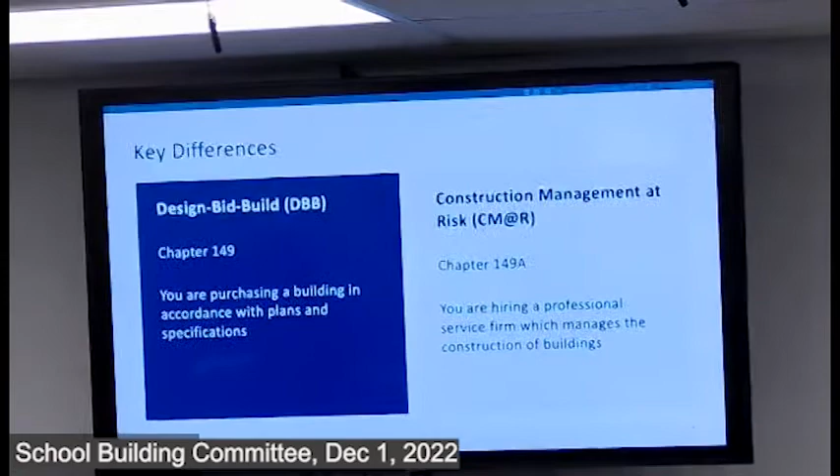John, excuse me one second - does everybody in the room understand what 'filed sub bid' means? I'll get to that in a second. Excuse me. No, that's okay. Then chapter 149A is construction management at risk.

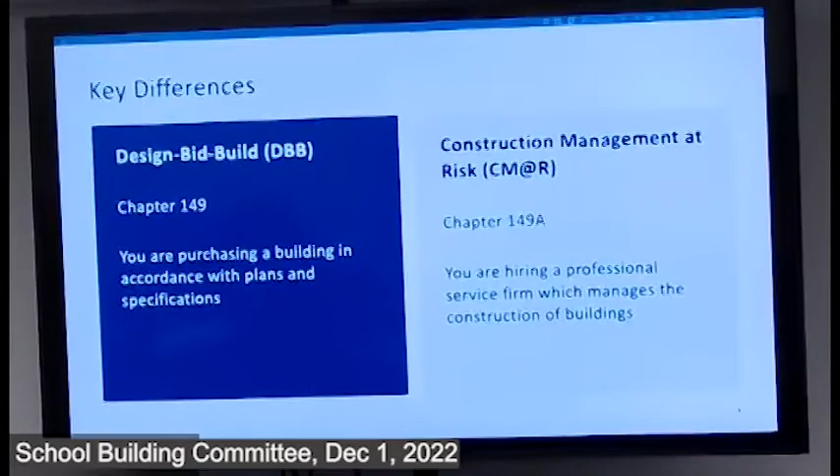The theory here is you are bringing a construction partner in while design is still ongoing, and they become part of the team, and they're supposed to represent your interests. That works sometimes, and sometimes you don't get as good a partner. It's a qualifications based selection, so we'll send an RFQ out, we'll send an RFP out. They'll submit their credentials, their previous experience. There'll be some fee information, and then a committee that the building committee will form will review the proposals, go to interviews, and make a selection, very similar to what you did with the OPM, but maybe a little more involved.

So with the CM at risk, we still have the OPM because the OPM is really in our interest, correct? Our responsibility is 100% to represent you at all times, whereas with the CM, we hope that we get a partner who is aligned with us too. But it's important that we have the OPM who's done this before. Part of that, the act that revised it, that's when the OPM requirements were enacted, back in 2004 I think it was.

This group, eventually, the school building committee will make a decision between these two options. Yes, and then a group or a selection committee from this group would also then select the CM via the interview and proposal process. Would that be a process structured by the MSBA, like other processes were? No, it's really local, they don't have any votes or anything per se, but they give you a lot of latitude in that one.

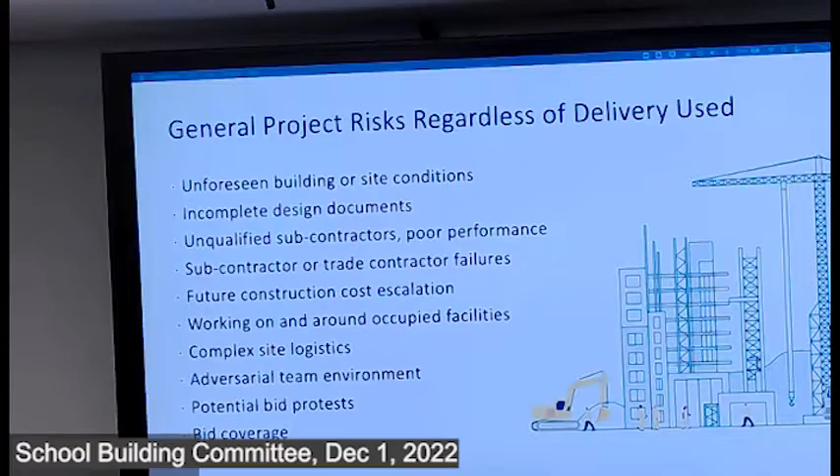Bid protests, you see these every once in a while, it's incumbent on us and your design team to make sure that doesn't happen. And bid coverage, we've run into this more and more lately, where contractors are being more selective on what they bid. Ideally we get three or more bidders in every trade. We've had some struggles with this more recently because of the economic arena we're in, but hopefully that doesn't happen here.

Cost implications: there's 18 filed sub-trades. Don't ask me to name all of them, but it's all the mechanical trades, tile, flooring, painting, acoustical ceilings, elevators, masonry.

The things that are not filed trade bids are concrete, site work, drywall, things of that nature. By statute, we have to bid these, pre-qualify subcontractors, and advertise. Regardless of CMR or design bid build, we have to do a public opening, so we'll work with your procurement people to make sure that happens.

The direct subs in a design bid build are the choice of the general contractor. They'll choose the site guy, the concrete guy, the drywall guy. We don't really have any input in that. I think in a bid situation like that, the general contractor is kind of forced into taking the low bidder, whether or not he's qualified, because they have to win the bid, and then they worry about making it work after the fact.

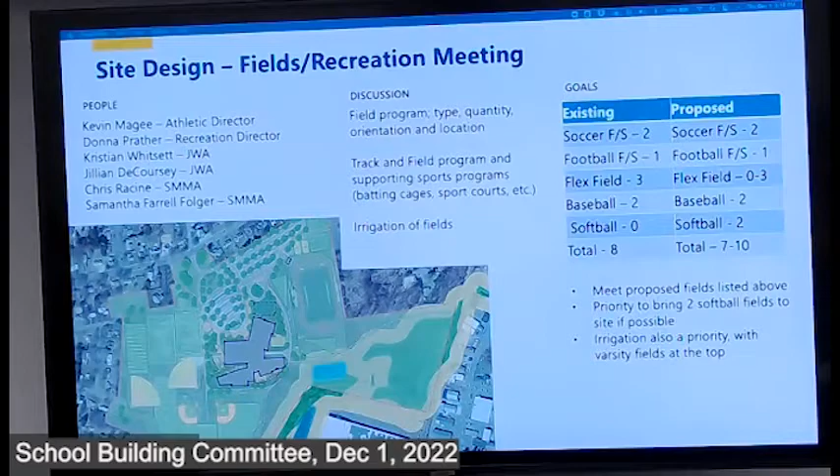To talk about the field recreation meeting: we had a meeting November 10th, not quite a month ago, with Kevin Magee, the athletic director, and Donna Prather, the recreation director, discussing the fields program and recreational uses. Our main discussion topics focused on the type, quantity, orientation, and location of the field programs, both existing and proposed. We also discussed the track and field program and supporting sports programs—javelin throw, discus, shot put, batting cages, sport courts—and then finally touched on the topic of irrigation of the fields.

The big takeaways were trying to bring 2 softball fields to the program as a priority. Kevin had mentioned 2 soccer fields and 1 football field on the western side of the site, outside the synthetic track area, that would need to be designated for sports and lined out at the appropriate dimensions, but the other potentially 0 to 3 fields could be flexible and used as outfields. The goal would be to bring in 2 softball fields and still have 2 baseball fields, but really to prioritize Title IX—ideally bringing in softball and focusing on the varsity fields for both baseball and softball in either scenario—and then having irrigation as a priority for the varsity fields, recognizing that right now irrigation on site only works on the baseball field.

I think there's irrigation throughout—that was something new we hadn't heard—but they've heard a lot of issues with the use of natural turf fields throughout the summer, especially with drought conditions. So if possible, trying to irrigate those 3 rectilinear fields and then the 2 varsity fields, baseball and softball, so those sports would have continual use without the deficit of dry or compacted fields.

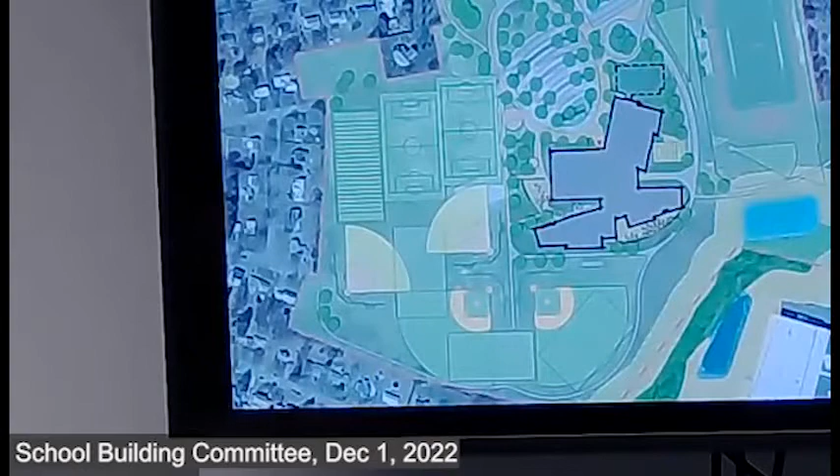Other things we discussed were the location of the basketball courts. Kevin noted they had previously been located closer to the school. He appreciated the educational use of having them closer to the school, but noted the issue of phasing and timing if those were to come online sooner.

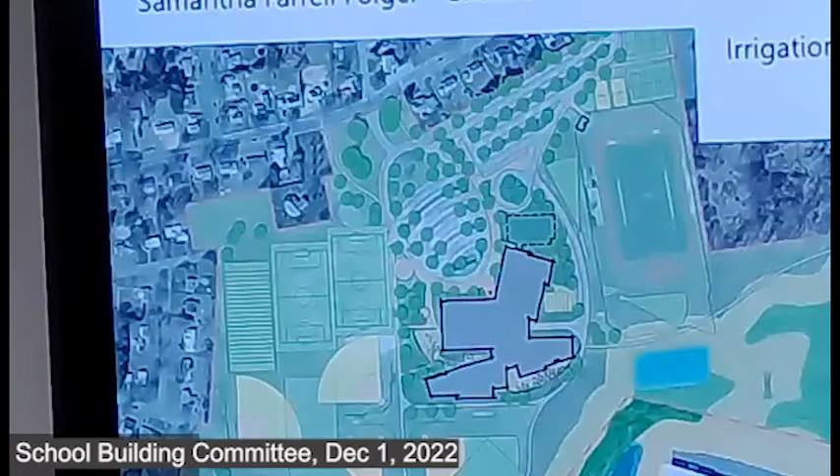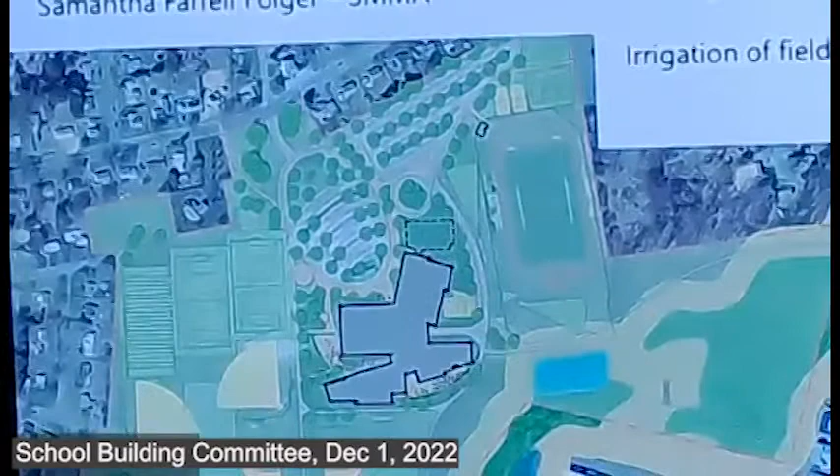So the basketball court shifted northeast to where the tennis courts are currently located in the proposed plan. Those are the two lighter green programs. And then the idea of a handful of pickleball courts were left closer to the building. Those aren't necessarily part of this project, but it's been mentioned in community meetings and raised as an interest. Donna appreciated that inclusion because they get a lot of requests for pickleball. So just wanted to bring that to the committee's attention, that we've been mentioning it as a planned program for future phases. If it does gain traction, there's space there, but it's not something we're currently looking at for this project.

Can we, just to clarify what we have now, can we do that? We have 5 tennis courts and 1 pickleball, is that correct? Can we convert one? Well, it can be used for either tennis or pickleball, it's lined. Can we match that at least, so we have the same that we have now? Does that make sense or no?

To host a tennis meet, I think you need all 6 courts. Tennis courts can be relined to have pickleball as an additional activity. Tennis is a larger program than pickleball, quite considerably. So I think Donna's hope was that the pickleball courts would stand alone and not be part of the tennis courts. But there is opportunity to continue that program and line some tennis courts with pickleball if that is an interim solution or something that works long term as well.

And I'll follow up that, for the estimating process, the pickleball thing has emerged over the current time. The question would be, do we want to get an idea of what that would cost? Do we want to include it in the estimate, or do we want to just anticipate the location long term? I think we should have a pickleball court as part of this, even if it's a dual, as we have now.

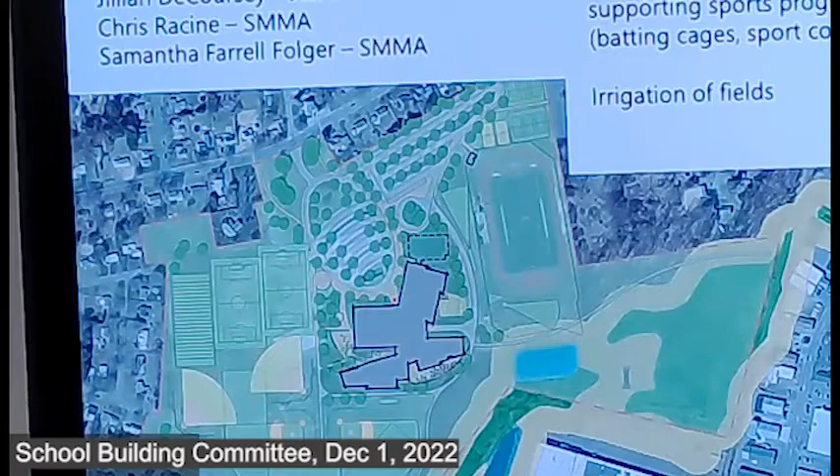Yeah, so the tennis courts are there, so you could have it as dual. Because I know it's used, it's probably used as much as the tennis court. I use multiple. All you're doing is striping, just lining. So you do the 6 courts and you can line. I think it's another selling point to that potential voter who likes to play pickleball. We have a court now. We should have a plan to have it.

I think the question is really about, so if you see the 6, those are tennis courts that could have pickleball courts on them. And then the 3 small ones next to the gym are proposed pickleball only, and that's the new element, but not included in the project though. That's the question. Should we just keep the space and not? Yeah, keep the space, dual line them, save it for later.

I think it is one pickleball per tennis court. Is that what you got? Isn't it one pickleball per tennis court? Yeah, it's one per, one-to-one. Can you fit two? No, Kathy, it's only incrementally smaller than a tennis court. As long as we don't take that away, that's all I'm saying.

I guess, so if we have a plan for it. Yeah, no, I think we can dual line them. I'm sure there's 100 people that use it on a regular basis, I think. No, I'll bet you it's at least that. Yeah, and phys ed uses it, they do pickleball. Tennis is 60 by 120 and pickleball's 20 by 44.

Get one on each side of the net. Oh, I've never seen it on that. They're very, very impressive. We just built some this summer. Challenging. So then we alternate netting if you're doing that, yeah, you'd have to. Yeah, you'd have, no, yeah, let's do it the way we have it.

Why don't we just, six courts is a lot, six tennis courts, and make two of them convertible? But line it so that it's still on the bigger court.

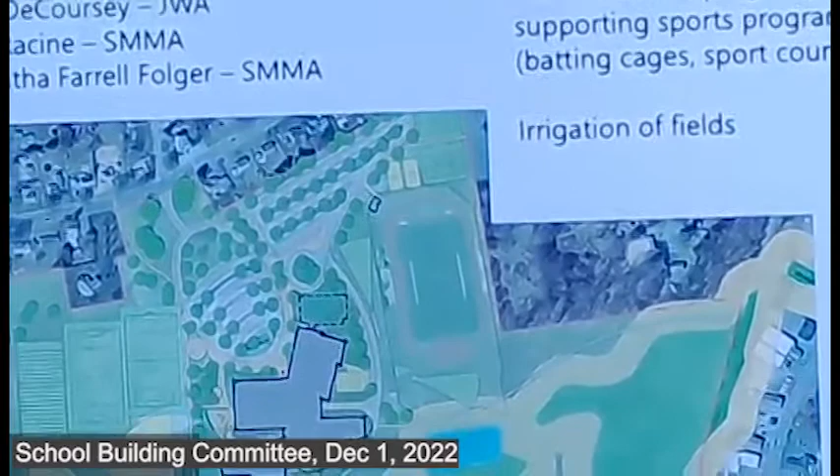One other thing I wanted to mention is that we're waiting on survey information for grading. That will be a big part of the field layout. You guys have a relatively flat site, but since it's such a big site with a lot of fields out there, regrading to get it all around the 2% mark that we're trying to hit for fields brings a little bit of a challenge.

So that will help decide the final layout, and then we'll circle back with Kevin and Donna when we have that information to get more sign-off on this type of layout, to see if those two softball fields facing each other would work. There's still some good planning, still some work to do, but this would be the ideal program if possible.

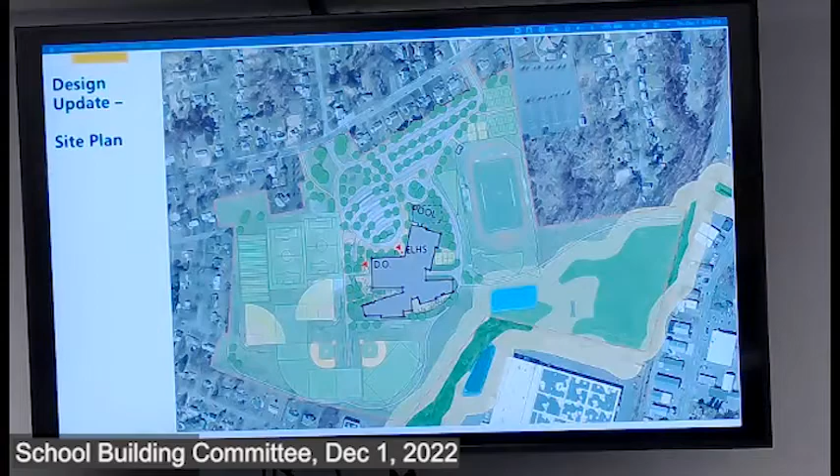I'm trying to think of other adjustments that we made since last time. There's the larger oval in the front that goes back to the site focus group's idea of an embracing green, so that has gotten a little bit bigger in terms of parking. We discussed with Frank numbers, and an additional 50 spaces were allocated to this front lot, so now the overall parking program is about 450 - 150 for staff, faculty and visitors, and about 300 for students.

We also looked to add a smaller branch off of that main oval for the district office, LCAT, and early education program. I will say it's a dead end lot, which we don't typically do, but it gets closer to the district office door. With a specific subset of users allocated to that parking lot, it wouldn't be an issue since they'd be signed and know only those people can use that lot.

I think it also alleviates some of the comments for fields. There'd be accessible parking in that lot, so it would be a little closer to get to either varsity softball or baseball fields. We have accessible spots there, correct? Yeah, accessible spots in that lot, yes, and at the front of the loop.

I wish I had pointing abilities, but I try to use my words. So that small offshoot to the west of the school would have accessible parking, and then there would also be accessible parking at the southernmost point of the oval.

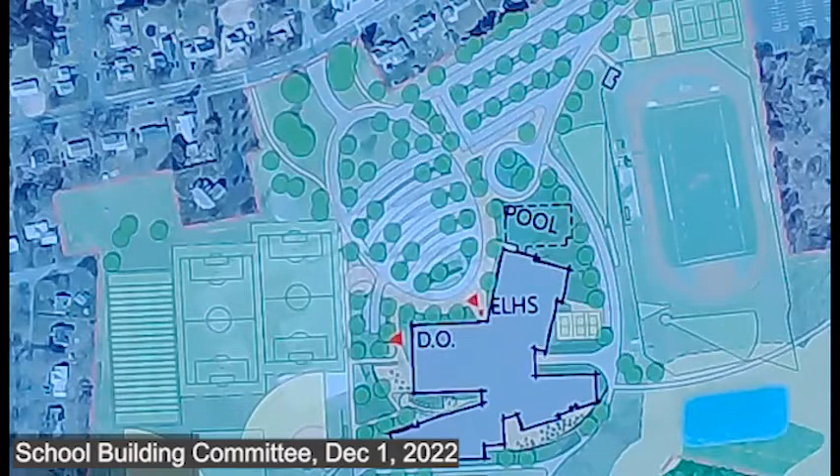West, to align with the arts programs, would be somewhat of an outdoor amphitheater, and seating within the outdoor courtyard at that western notch would allow a lot of those classrooms and the art program to spill out there, to have more formalized areas for learning with tables and chairs, and potentially a chalkboard or projection area depending on uses. I think these are all programs that still need to be vetted, but something we've been thinking about in terms of matching the interior program to the exterior program.

And then the southernmost piece would be an outdoor dining space that would extend from the cafeteria and dining commons, and allow the eastern wing of classrooms to spill out onto the terrace to use them as flexible learning spaces.

If those spaces in the back south area could be covered, so if it was a little inclement and they want to sit outside - I like something covered - and then we could use it for summer camp programs and stuff like that.

In inclement weather, they'd have a place to go that's still outside but not exposed. Yeah, I think that's a great comment. We haven't really gotten into that level of detail with the building yet, like overhangs or awnings. Whether that wants to be a standalone site element is a possibility as well. Sometimes you do shade structures, shade sails - there's a lot of different ways we can go, but I think it's helpful to mention that now so we can work it into the plans.

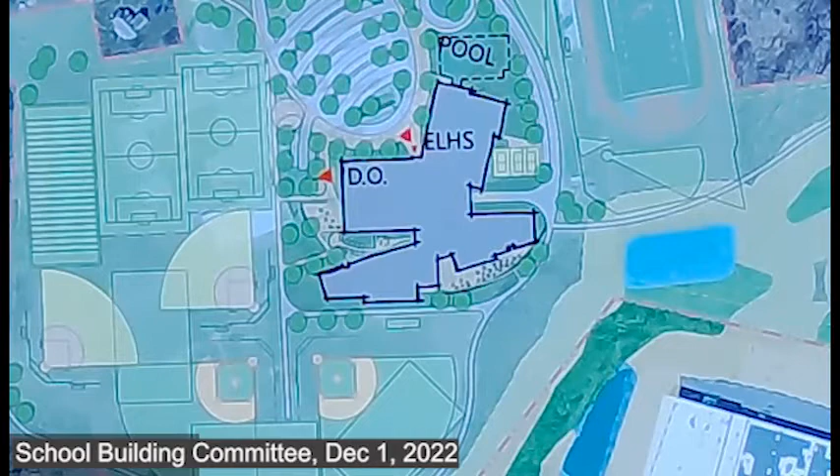Site circulation - we're trying to reduce the pedestrian and vehicular conflicts. So as you come in off of Maple, there's one main loop with clarity and circulation to bring people to the front door. That allows staff to come in earlier and filter into the parking lot.

What we haven't decided - we'll have a meeting tomorrow - is which group gets to approach the front door. Separating parents and buses, one group would use the main loop and the other would use the smaller loop that enters off the east.

That smaller eastern entrance has queuing along the northern side of the track and field, with students also entering into the parking lot from the northeast entrance and then exiting out of the main loop potentially. There's a lot of different configurations.

One thing we took from our traffic meeting was that with the two separated loops and a communicating node between the parking lots, it gives multiple configurations for East Longmeadow, allowing safety and separation, but if something's not working, you can reconfigure it using different signage or practices on site.

We still have services entering from the east of the school with a Y-turn to access that loading dock. Emergency access would go from the western side of the site down to the southern end to allow fire or maintenance vehicles - that's the dashed line you see.

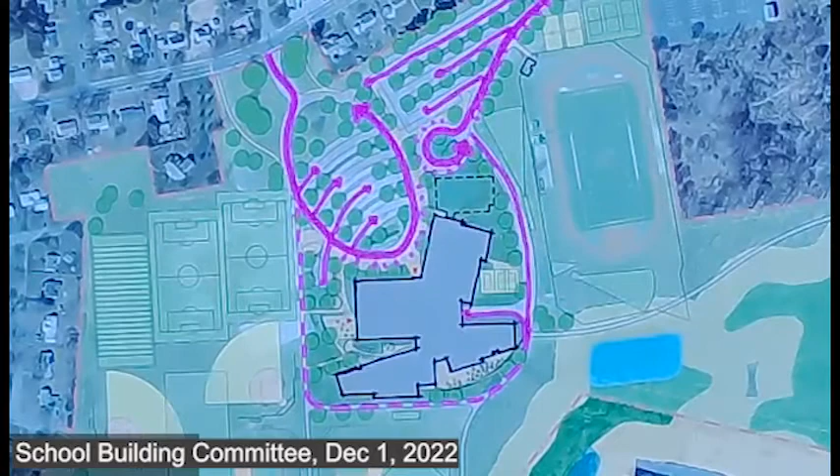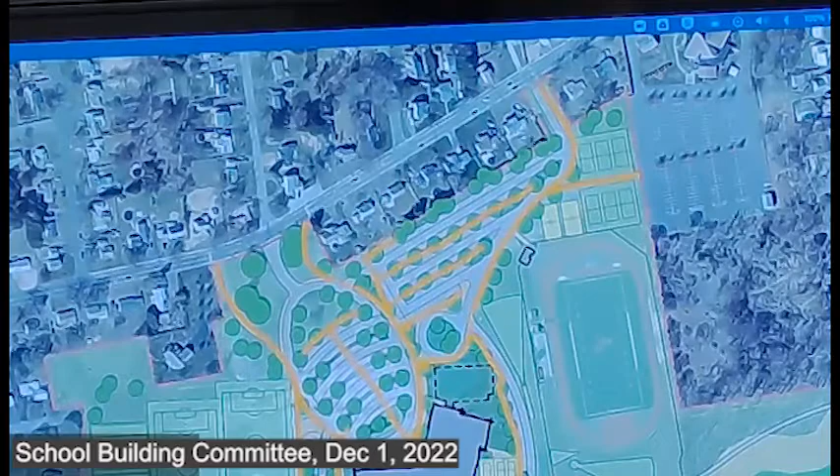The yellow is the pedestrian access. So we're really trying to increase the pedestrian access on site from Maple down into the field spaces and around the building, as well as out the eastern side of the site, which we recognize a lot of pedestrians use. We are showing a path connection to the south of the fields. That's something we've discussed as potentially being an alternate, but I think it would benefit connectivity on the site.

We're trying to separate the pedestrian and vehicular circulation systems as much as possible for safety, and really creating welcoming spaces for any pedestrians coming into the site and entering on the north side, and then for the students that are using 360 access around the building.

Can I ask a question? I'm super happy to see that the kids' access isn't near the street anymore, because I can't believe we haven't lost a kid with that yet.

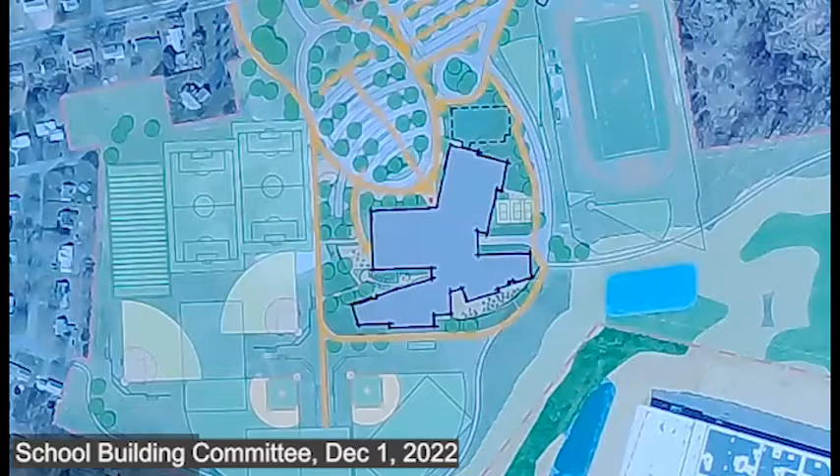But will they be putting up another light situation, like a crossing either for pedestrians or for cars? We're gonna talk a little bit more about that further on. Okay, so we'll report on the traffic initially. But I am happy they're separate, I think that's important, the pedestrians from the cars.

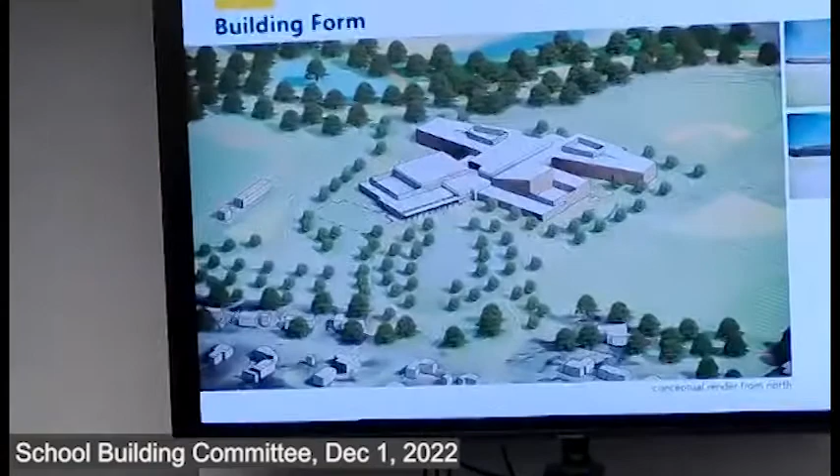One element we've added here, and we may expand it a bit before we get to the end of this phase — there's really not a lot more design that will go into this phase, because this phase is really about testing the building scale and footprint. We do the massing to get a sense of potential impacts on the neighborhood, and MSBA will be really interested in that. Being central to the site, there's really not much of that to be concerned about.

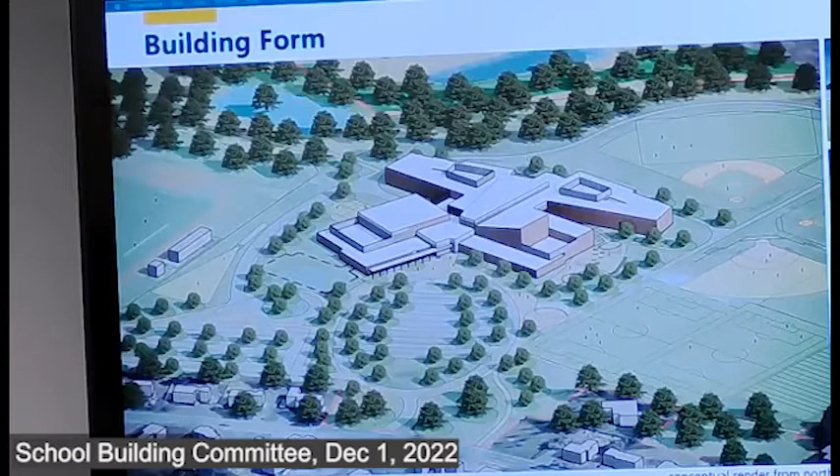But we also use this to get a better sense of the environmental qualities, and the quality of space even — what are these building masses looking out onto in terms of the courtyards, in terms of the visual or the forested buffer, for example.

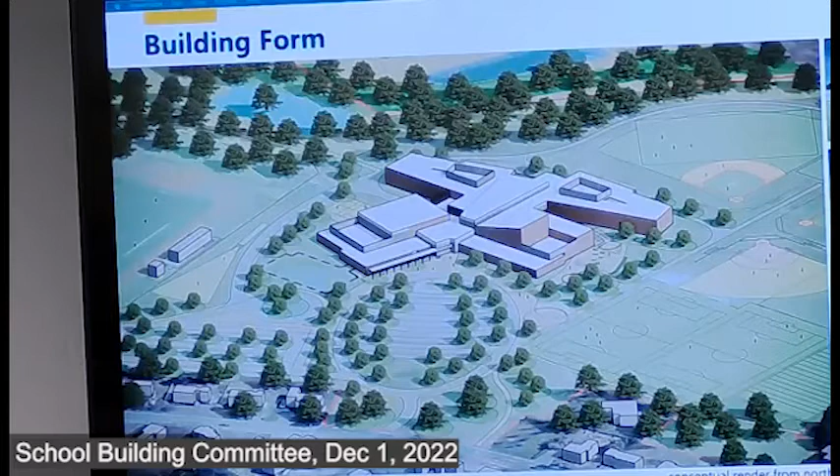Back to the front of the building, that sort of drop-off sidewalk area is really important — that plaza that connects to the front door. So we've added a sheltered walkway element, much like what you have now on the left side, that's the west side of the health wellness wing, and it helps connect back and provide a sheltered walkway for the drop off, which we know could extend almost over to the field on the left.

Was that where the buses would — where the kids would get on the bus?

The buses would be in the front, I believe, on the big loop, and car drop off will be on the small loop on the left. We haven't established that yet, but there's possibilities for either scenario to happen.

Sorry to speak out of school on that. It often goes back and forth for a while, but we know there'll be foot traffic going along that side, so we said we should have something there. We may want to expand that to more of the front of the building, to have more of a collector. We hesitated to put it in front of the admin because that will encourage gathering in front of those office windows. But we could pull something out toward the curb more, and it could become another layer of space-making at the front of the building that can be a collector, much like you have now, but in a different inflected form.

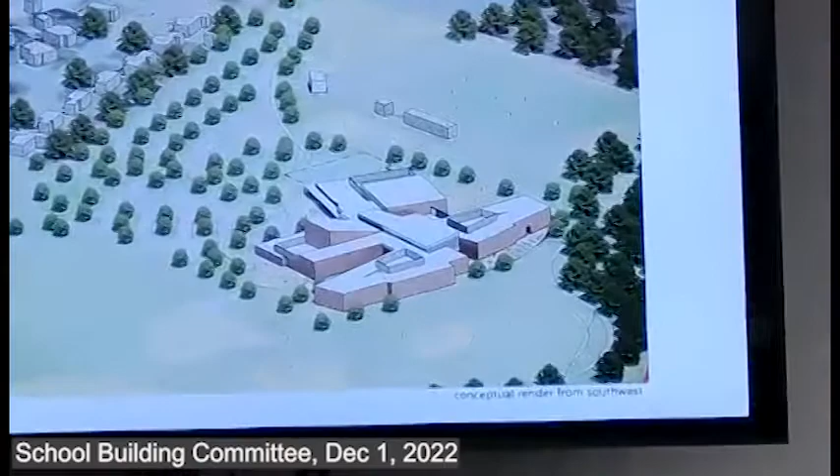Thanks, Frank. I think we could roll through the rest of the images fairly quickly. So we're looking here from the southwest, giving a sense of the relationship of building to the fields on that side. You can see there's not a tremendous amount of extra space between the building and the fields, but we're taking advantage of those spaces.

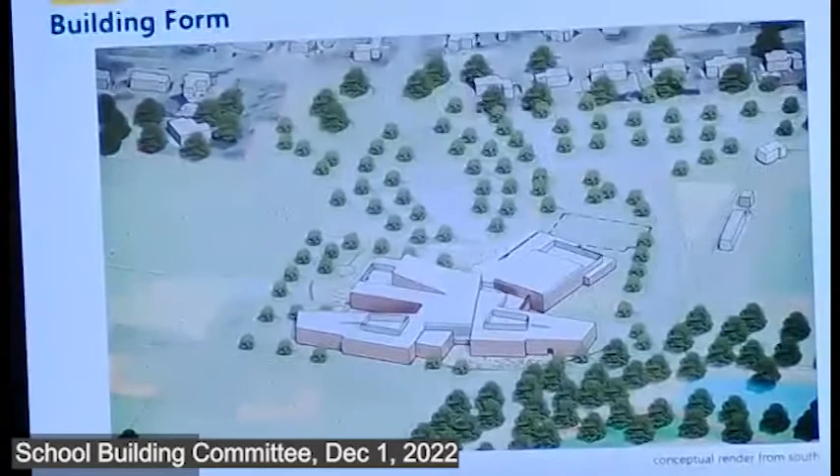I think the next image shows better the driving of that kind of main circulation, main street if you will, that has the dining commons within it, and then sort of opens out on the end. And Greg, here's the LGI space, large group instruction, as a volume within that. Not to steal your thunder, Dory, because I know you're going to talk about that more, but that's where that emerges on the other side.

And here you can see the possibility of an outdoor terrace coming out from the dining room, right here. And the potential for outdoor classrooms, learning space that might be an extension of science rooms that have earth sciences and observatory kind of functions. I don't know if we've ruled out a greenhouse already at this stage, but possibilities for plantings and that kind of thing.

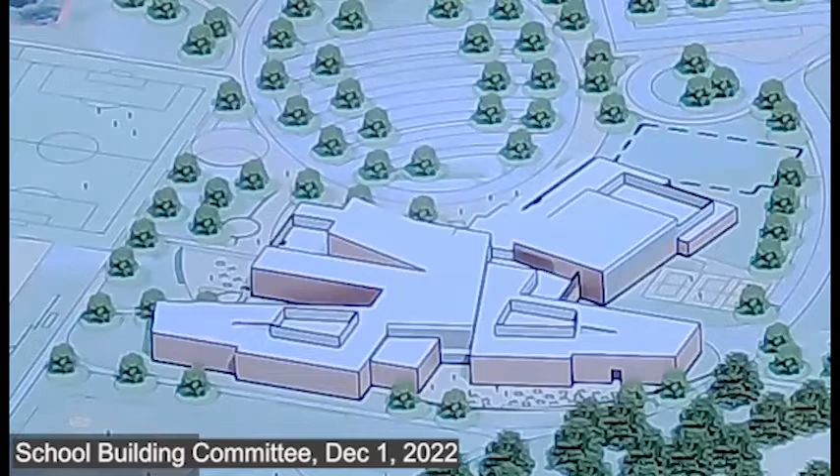It's also just much quieter on this side of the building. These are 2-story volumes on this side. Next image. So those are 2-story.

Yeah, the classroom wings are 2-story, and it will be higher. Yeah, those top screens up there are probably not necessary, really. I think the design team has taken it seriously, the challenge to keep it a 2-story building.

There's definitely a desire to compact the footprint, and you could go up another level, but that's just another level to have to traverse. It adds to passage times, classes and things like that. So 2 stories is easier to manage.

It also opens up some possibilities in terms of the configuration of the building. We can create sort of mini atrium type spaces without much added cost. Atrium always sounds like a fancy, expensive thing, but simply if you can open up the floor from one level to another, there's a huge benefit in terms of understanding what activities are going on in the school, where otherwise you're very segregated by floor. So I think you'll see that more in the plans.

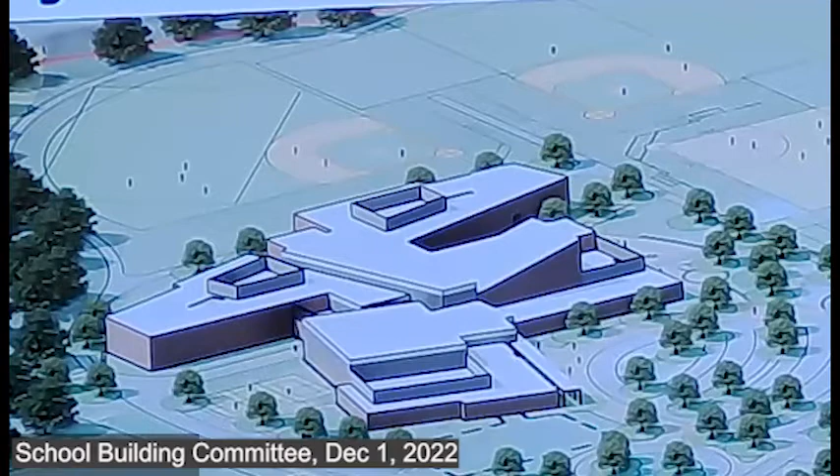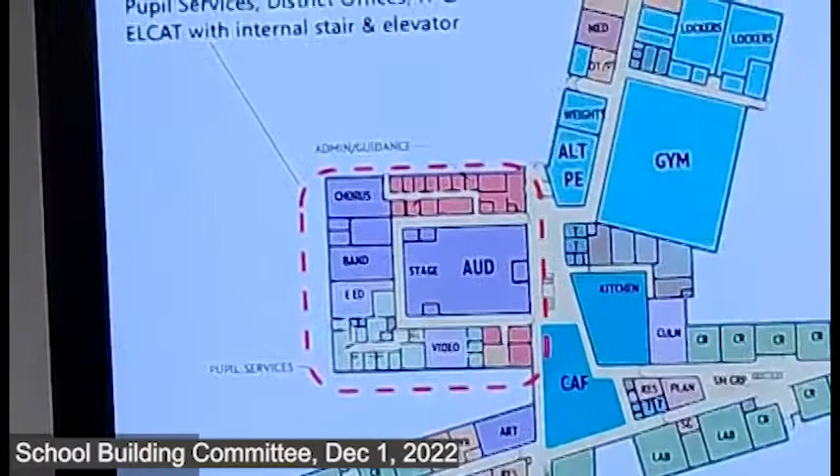So just to turn to plans, we did share these - slightly evolved from what was shared in the community meeting. To start out, I want to talk about the district office discussion. Last time we met, we showed the district offices and ELCAT and IT as this kind of lump next to the building, and you all said, well, why don't we go ahead and try to incorporate it so it's part of the footprint, reducing the overall footprint.

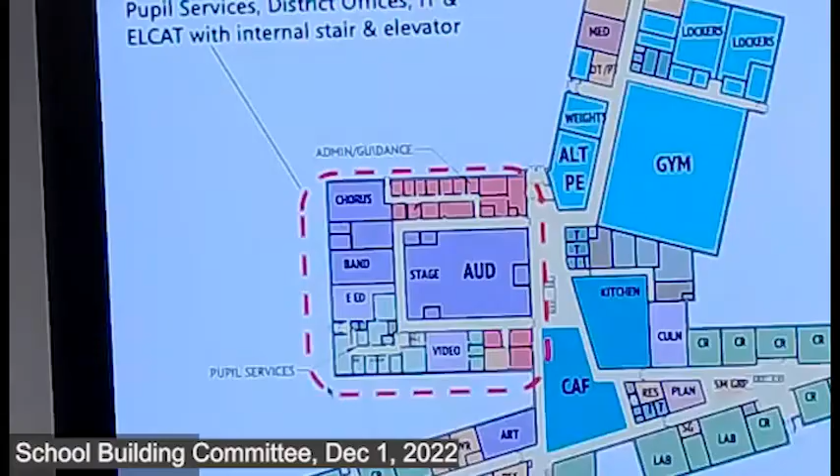So that's what we pursued. Yesterday, we presented two options to Gordon, Frank, Don and Ryan, looking at a configuration where we had the district offices all as a one-story element, right where you see chorus and band. This option, the preferred one, does it as a two-story element. Here you have the early ed classroom and pupil services sharing their own entrance to the west, where you'd enter and go into the pupil services area. Within there, there's a stairwell and an elevator that takes you to the second floor, which is district offices and IT. We're going to go into this in more detail.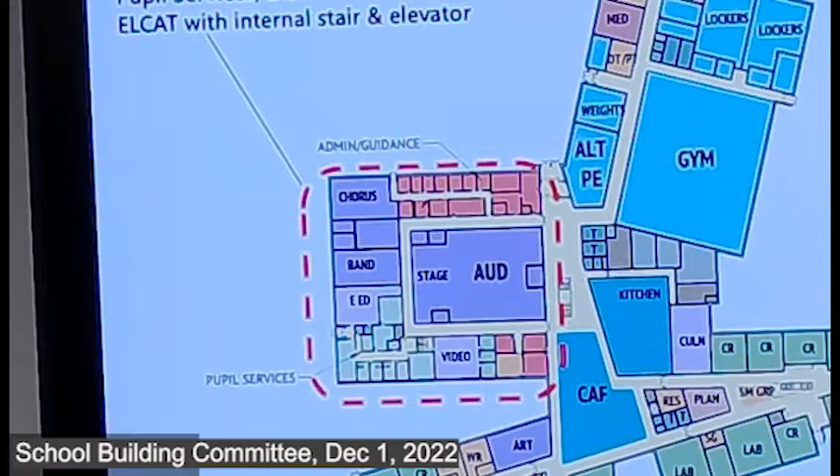So go ahead, forward - and a possible fire pole. Yeah, he's asking for that, to get down quickly. Can I have an exit plan?

So this is a close-up of that. At the bottom is the first floor view. You see to the left side of the screen, in the west, a vestibule that would get you into the pupil services area. We tried to keep this fairly compact, not overly generous, but this does connect through to the video classroom.

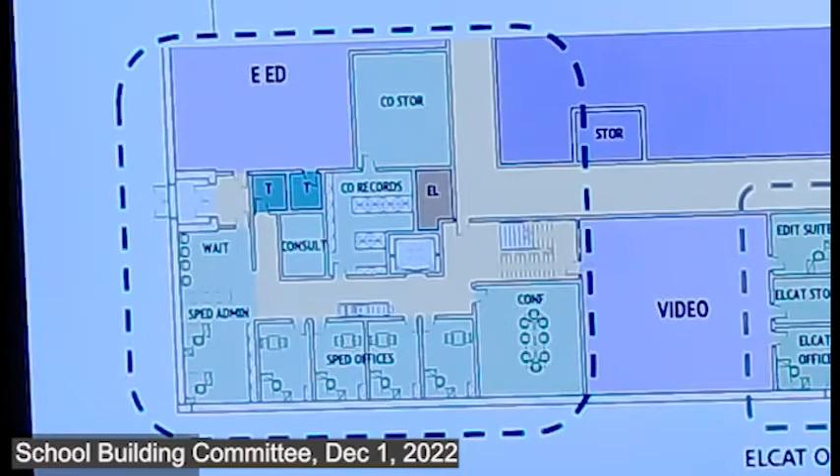And on the other side of that are the ELCAT offices, so those are co-located. Then part of the guidance program is at the end of that block, right adjacent to the cafeteria. That's where the career center would go, along with your graduation coach and guidance records.

And that sped conference room is there because there are meetings that have to happen with families coming into the high school for meetings. So they would be able to go into the school and then into that conference room for private meetings, which is different than this conference room to the left, which is supporting the district's meetings with families.

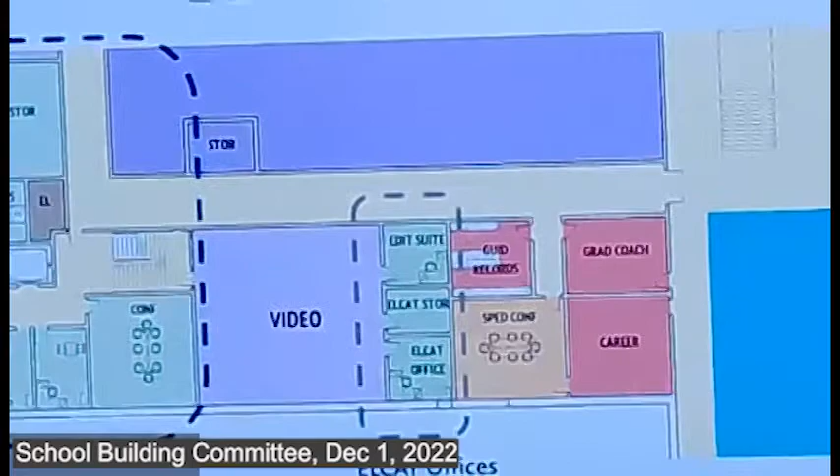So then you would go upstairs from there. You're still on the same slide on the upper image. That's your administrative offices. Again, these may be rearranged later, but basically this accounts for 4 staff offices plus the superintendent's office, 2 secretarial staff, a kitchenette, and another conference room, a more generous conference room to support leadership meetings. And then continuing, that yellow is a continuous corridor into the IT wing, which provides all the offices for IT. And then at the end of that is a tech support office, which actually students can access.

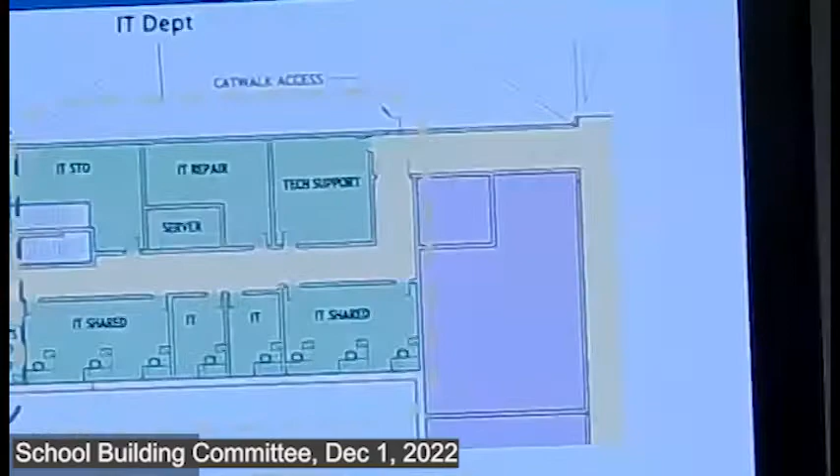So the idea is that's adjacent to your second floor near your media center. So while we would have a doorway separating this school, it allows students to come in and faculty to come here to get tech support for the school. And then you see that door that says catwalk access - this conveniently aligns with the upper floor catwalk over the auditorium as well.

So no bathroom on the second floor? Again, you're part of the school, so there are bathrooms. Is there a bathroom on the ground floor? Yes, there is one on the ground floor.

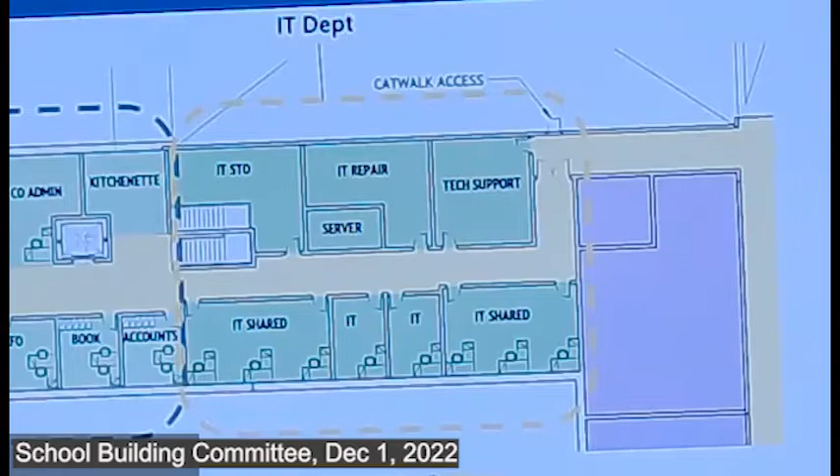Take the conference room - actually, I just revised that this afternoon. And where you see on the second floor that admin and kitchenette, I went ahead and put a bathroom there behind that elevator because I felt like it needed it.

And this caused us to add another elevator too, right? That's my feeling. I think it's smarter to have it because in a school of this size, this way we would have one elevator that's actually serving the student population at the academic wing. And this elevator would allow for night access without any other access to the building.

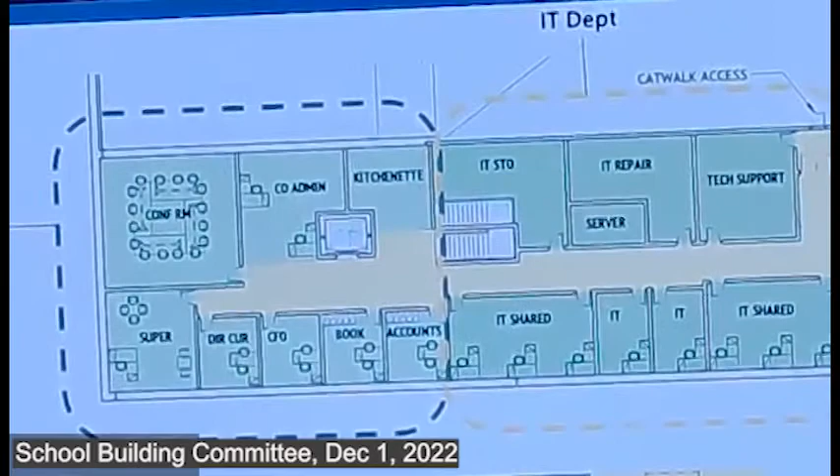So there's only one elevator in the main building? There's one here and then there's one in the... You didn't need one in each wing? No. Okay. No. What about the cost factor of that, though? I would imagine. Yeah, I mean.

Does that negate the need to put the benefits of putting admin on the second floor? I think the comparison of those two wouldn't be super similar, really. And we did explore this without a second elevator, but the more I thought about it, the more I thought in a school of this size, having one elevator that you're dependent on might not make sense anyway, because having the redundancy of a second elevator is going to help in the event that you have an elevator go down.

For students as well - so even though it's not as convenient, the fact that you do have this second elevator, I think is good. And I think low-end lifts are not a great solution, so I'd rather start with that. And, you know, it is a cost. Couple hundred thousand - 200,000 would be my guess. Oh yeah, yeah, but that's, you know.

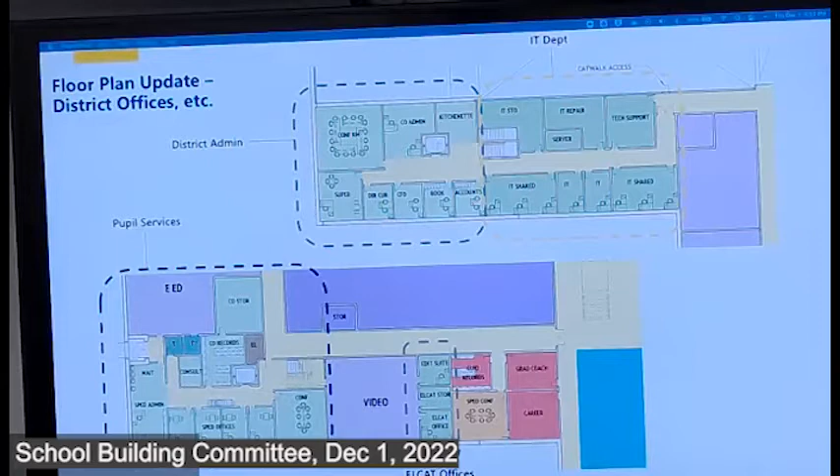So back to the plan as a whole - we'll continue to make changes. There was a couple other questions on that plan that we were discussing. But to get to that question about the large group instructional space, and to talk about all of these things here, this is generally where we are.

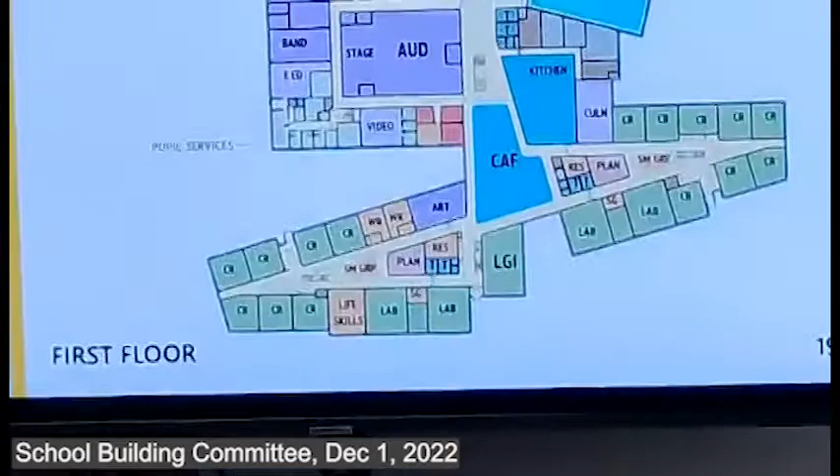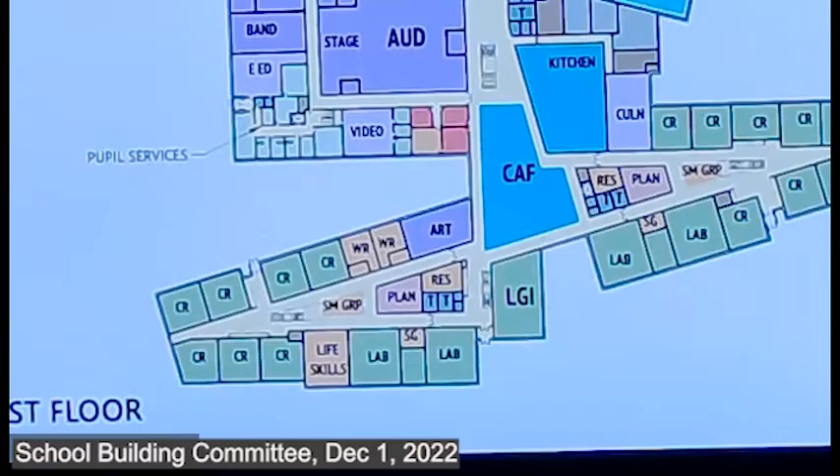We're at the point where we're trying to build out a lot of these individual areas, get the mechanical spaces worked out a little bit further. We've asked the team to provide needs for, based on this plan, electrical room distances and such, so that we can fill out and be sure we're reflecting the square footage that we know the project needs, and we're not missing anything at this point, but it's still early.

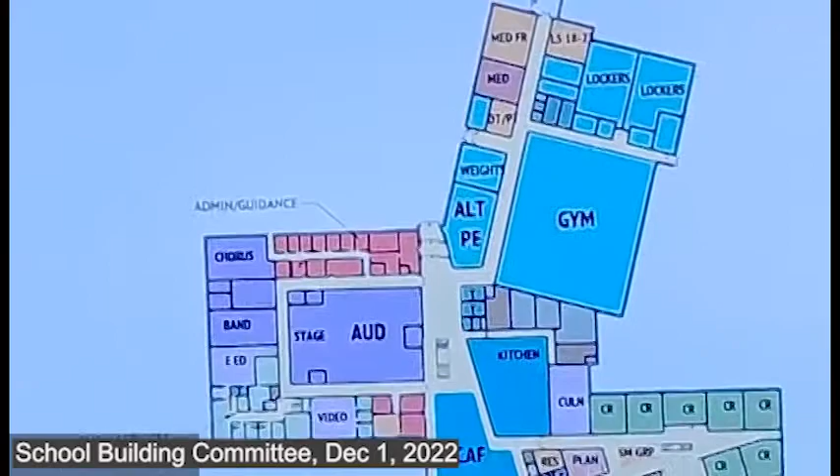And we're, I think Brian was saying, we're going to basically stop design fairly soon in order to wrap up this phase. When we get into schematic design, we'll get really detailed with all of this. But conceptually, this is where we are.

What was preferred about this design is that administration and guidance at the front is largely contiguous, with the exception of those three rooms pulled off closer to the cafeteria, which I think is a good thing because students have access to that career center, grad coach. It's more within the life of the school rather than separated away, but it still keeps guidance and admin together, which was a really big goal.

We're just starting to work in that gym PE wing a little bit more. I want to point out that Alt PE is a multi-purpose room of substantial size. I wouldn't be surprised if you found community use of that room in addition to the rest of your PE facilities, but it's a room that can be used in more than one way. As we talk about its location and use, we can define the finish so it might serve as a meeting room, a dance room, or a yoga room.

I think that's a great, important thing. So instead of the LGI, that would be the community room, and it's up front. I like the dance studio aspect of it, the option for meeting rooms, multi-purpose near the rest of the athletic things, with the weight room right next to it.

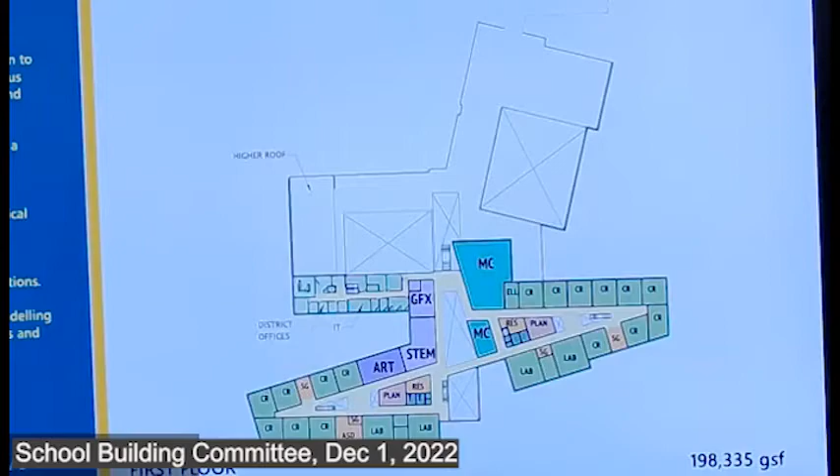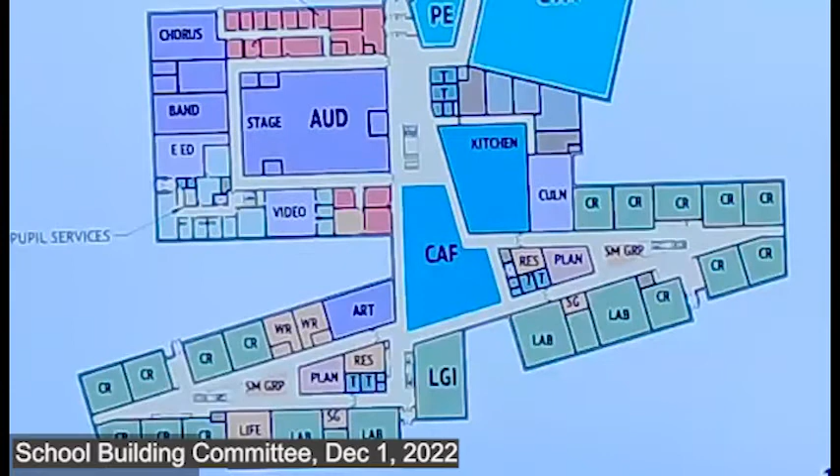You see the elevator, the second elevator is right there on the right-hand wing in the middle of it, where it says RES. If you go down a floor it might help you see it—it's facing towards the cafeteria. We originally had it up near the auditorium, but based on the second elevator concept, it felt good to put it in the middle of the academic area instead to really support students.

And then we have the labs distributed, each wing has two labs. Special education spaces are also distributed, so it's starting to feel like it represents the academic diagram pretty well. We've gotten all those other category spaces in the building in a way that keeps the footprint as small as we can without going to a three-story building.

Dory, what's the approximate GSF of the district offices? 7,000 square feet.

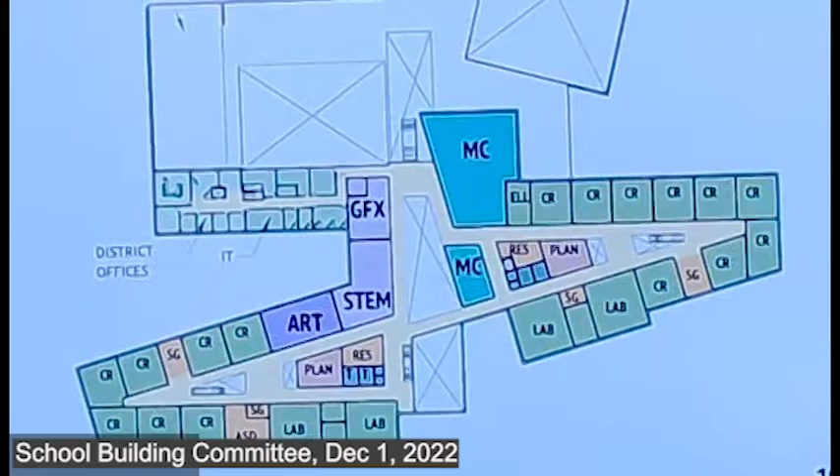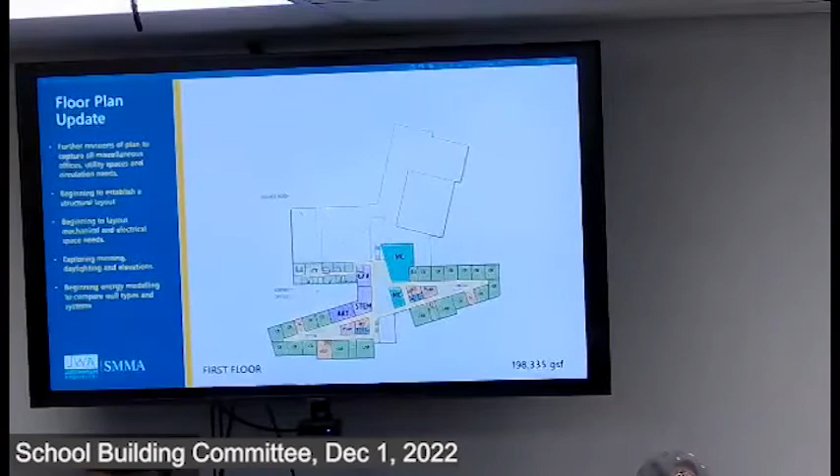Could you repeat that? 7,000? Everybody was looking to write that number down. Is that included? Gross square. Yes, that's both floors and IT, that whole IT light green area as well, and LCAT, all of that together is 7,000. That's 7,000, not including reimbursed grossing. The hallway is not counted because that's part of the building. That's district offices, student support services, IT and CAT.

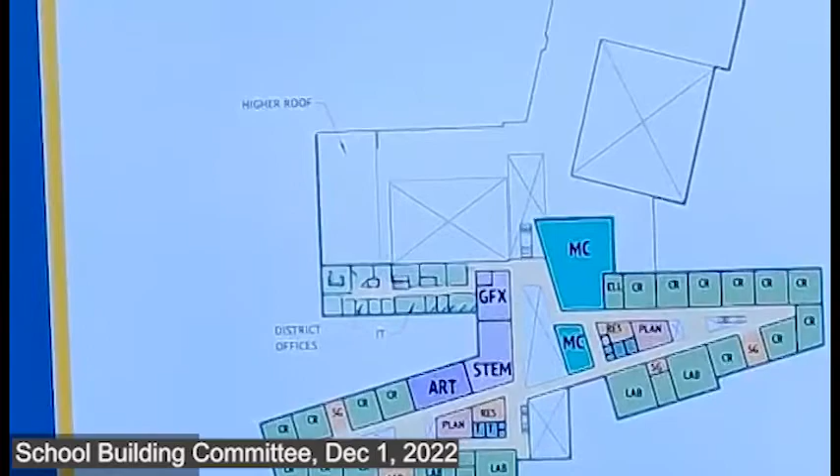So other things we've been working on: we're starting to explore the structural layout, the mechanical and electrical spaces. We're exploring the massing and starting to think about the daylighting elements, which is getting us into energy modeling. We've been debating different wall types and their cost impacts. What you'll hear about in the next school building committee meeting is HVAC systems. The outside envelope of the building and the systems strongly interrelate now in our design, in an integrated approach. We've been doing a lot of work on that, but there's a subcommittee meeting that's going to review more of it, and we'll present that output in the next meeting.

So a couple more slides, looking ahead on the cost estimate we were talking about. Originally we came out of PDP with 4 options. The one not listed there was the community building option where we broke that out. You guys decided quickly there's no way - that was just too expensive as an option, so we did not carry that forward in PSR. I don't think we have an obligation to price that because we already ruled it out as an option entirely. We had to carry the base code upgrade anyway.

And we have the add reno that we've explored and the new construction option. I want to be clear that my expectation is I'm presenting to the cost estimator these 3 options for repricing, and the pool will be removed from that pricing, because we want to be clear on what the number is for this project - that number has to be developed as part of a separate project. That way we won't keep confusing ourselves and everyone when we present that. Then will we eventually get a price on that after they're done with the main thing? You will, and we have that general number we've presented. I think that has to go - I've been talking about how that needs to go to the town council so it can start to become a project.

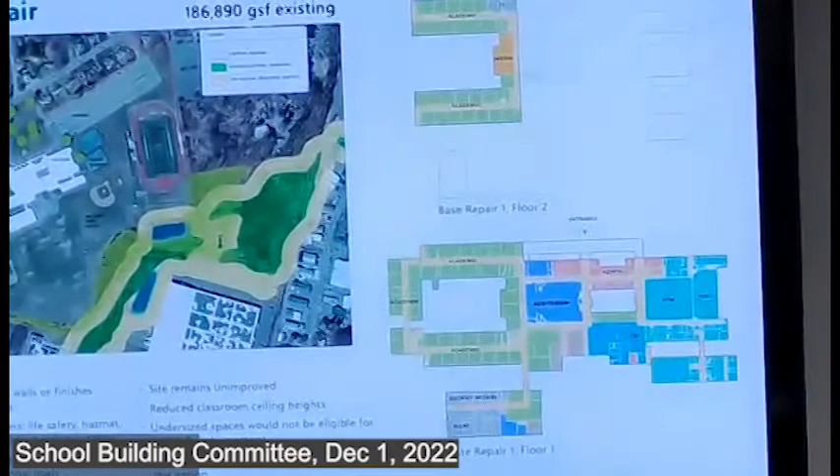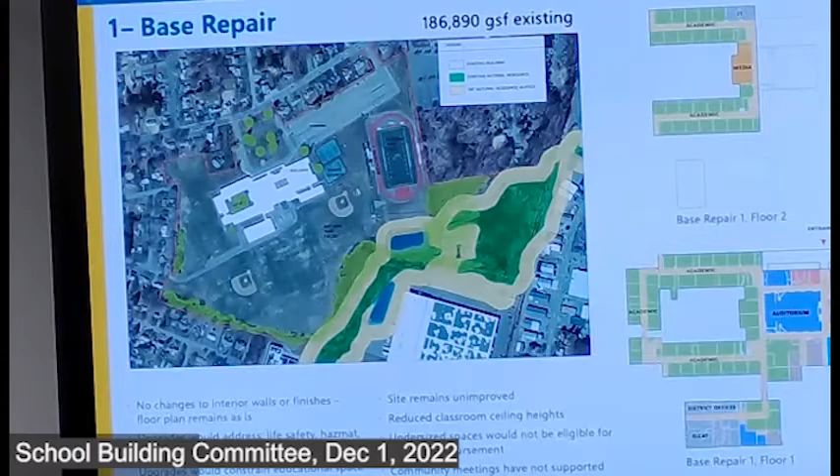So again, this is the base repair option. I know you guys know it, but I was encouraged to keep speaking about the base code option. Remembering that the community's definitely not been eager to see this, part of the reason is that we reduce classroom ceiling height, undersize our spaces, and would not be eligible for MSBA reimbursement, so your reimbursement percent would be extremely low.

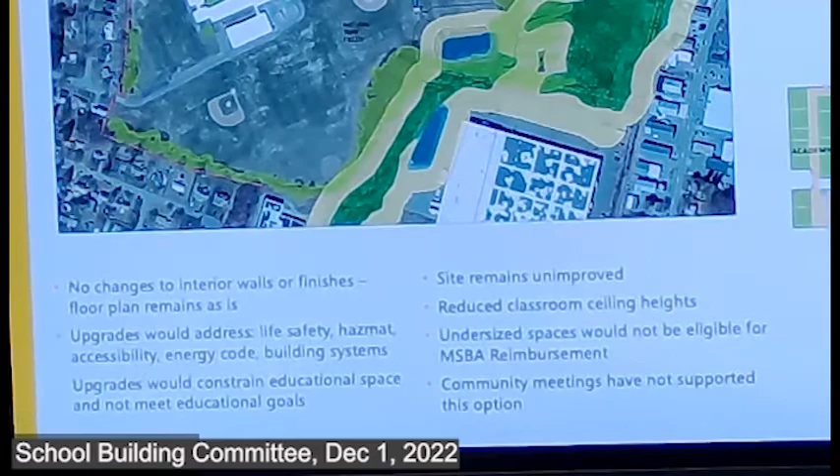This information is still very helpful because it talks about what the cost of the project would be if you fail, essentially. If you don't get a school done, you will not be off the hook for spending a lot of money. That's kind of why we keep that number in front of you, to talk about what it means to not do a project, and what the code costs are over time.

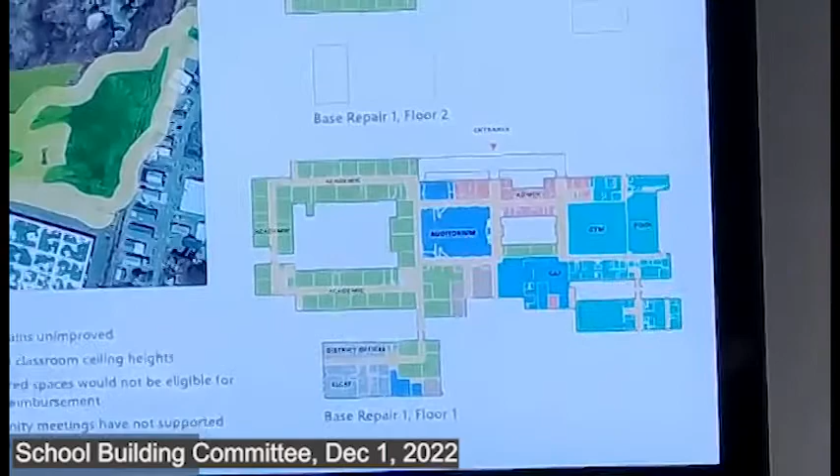Once the MSBA looks at the three designs, will they give you an idea, just so we have that information? They won't do it all, not till the end of SD. Not to the end, okay. I just thought it would help our cause.

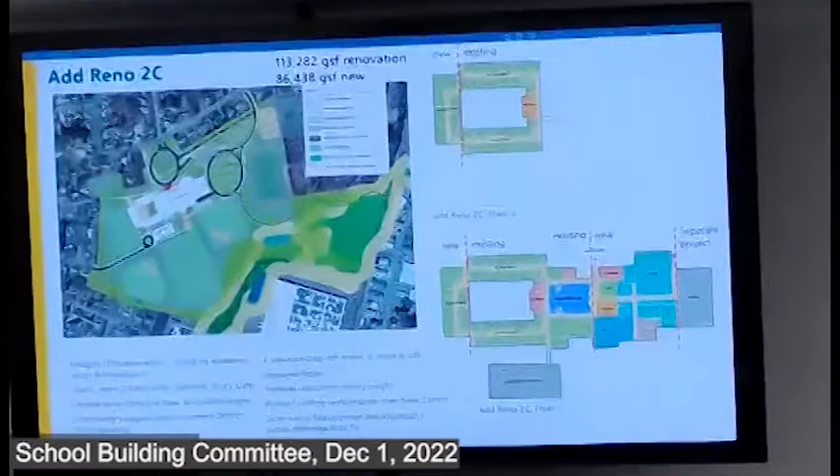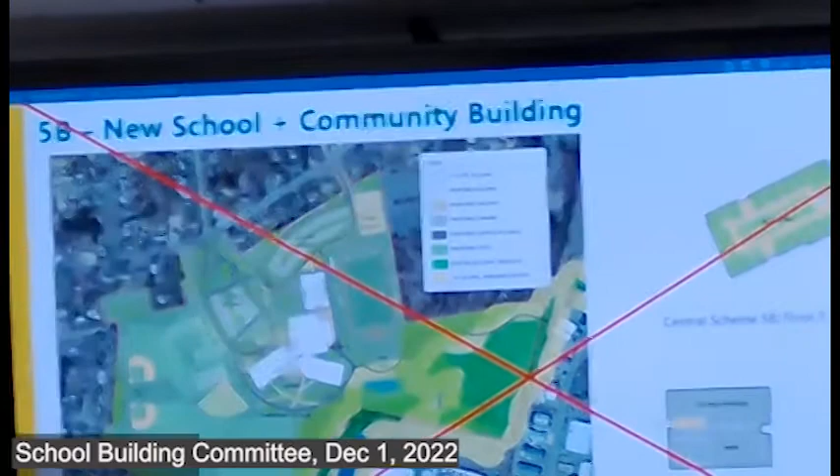And then this is the one that we're not going to bother to go through the motions on. I think in the end, we're better off doing what we're planning, because I just think it's all going to be in the building, and overall better.

The investigation work that's ongoing - we still don't have a complete survey. The wetlands work has gone forward and things look good, no surprises.

So just curious, what's the issue with the survey? Why can't they get it done? Christian's been managing that and he's been struggling to get answers as to why it's taking them so long to complete the survey. Who is it, Heritage, I think? Yeah, used them for it. I think they seem overwhelmed - I'm having trouble with them on another project too.

That's pedestrian access to the rail trail, in terms of wetlands it's on the plan, and walking through the wetland flagged area is fine - within that buffer is okay. It would have been a problem if the buffer ended up putting the building across the line. We still could have done it, but it would have been more complicated.

So we were planning to have access then to the bike trail? Yeah, and that's another thing we have been carrying, that pedestrian path. I think what Sam has said is that the connection to the rail trail is not something we can formally do yet.

It's a rail trail, so it's a lot higher than the wetlands because it's a former rail line. So to connect up to that would require some switchback ramps, and to work it through the wetlands would likely require some Conservation Commission meetings. I think it's something we should talk about if that's worth pursuing.